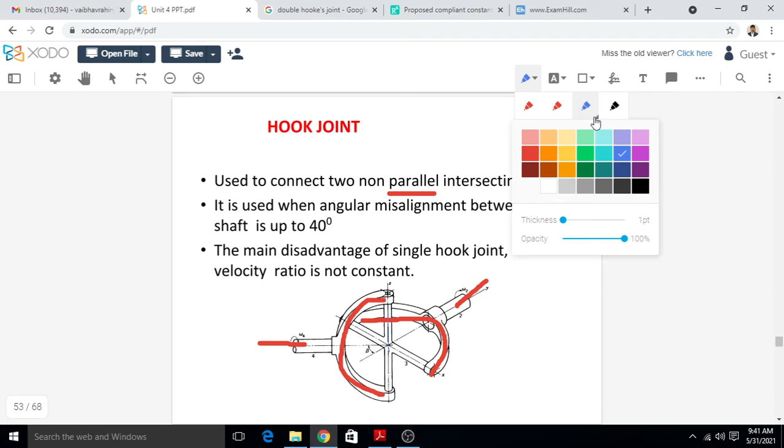And this is a cross. I will show you here. This is the cross. Two ends of the cross are attached to the driving yoke and two ends are attached to the driven yoke. The shape of the connecting link is a cross.

The inclination of the driving to driven shaft may be constant, but in actual practice while transmitting the motion it varies. We consider the angle between driving and driven shaft constant, but in actual practice it may be different or varying.

One main disadvantage of the single Hooke's joint is that the velocity ratio is not constant. If the driving shaft rotates at 1000 rpm, the driven shaft rpm is not constant. It varies between some values, and these values depend upon the angle between the two shafts.

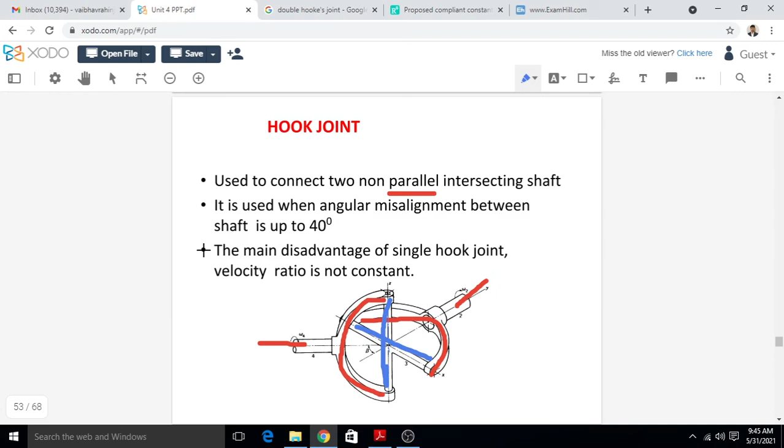This is the image of the hook joint. This is the analysis of the hook joint. These are the equations. If we see the velocity ratio equation, that is omega 1 upon omega is equal to cos of alpha upon 1 minus cos square of theta into sin square of alpha. We will derive this equation in the next lecture and we will find out the different conditions.

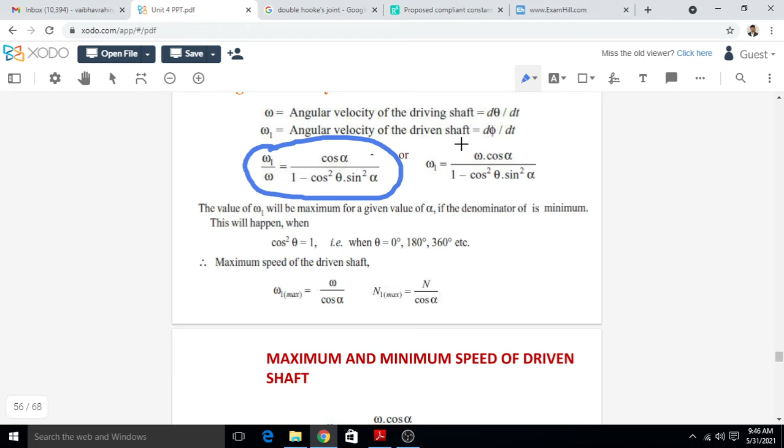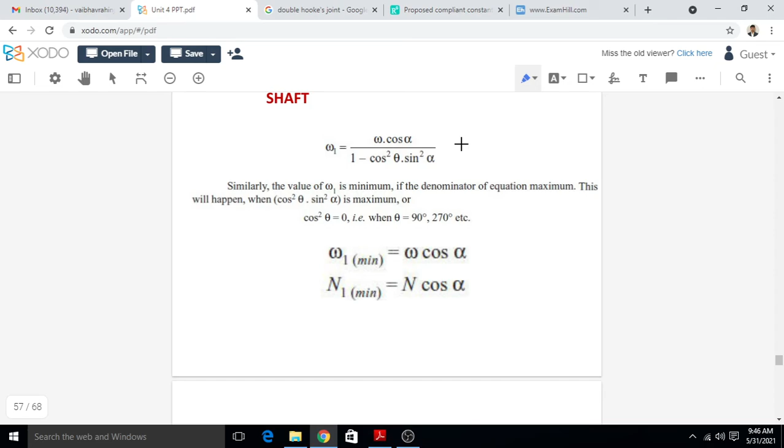Okay, these are the conditions for minimum speed. The minimum speed of the driven shaft is omega into cos of alpha. Okay, this is the equal speed. This is the condition for equal speed, when the driving and driven shaft will rotate at the same speed. Okay.

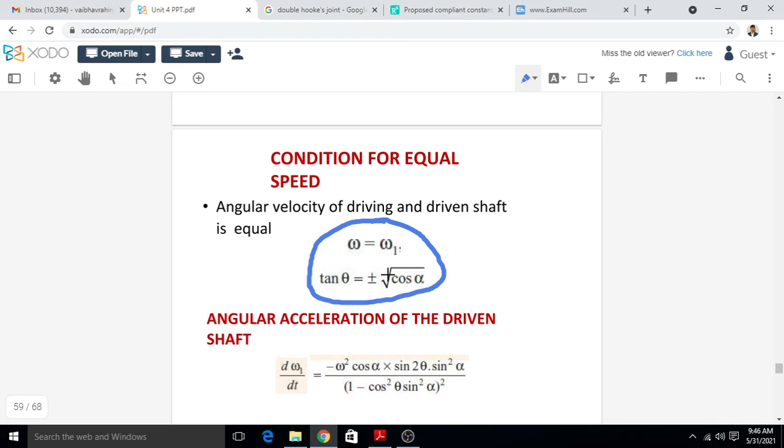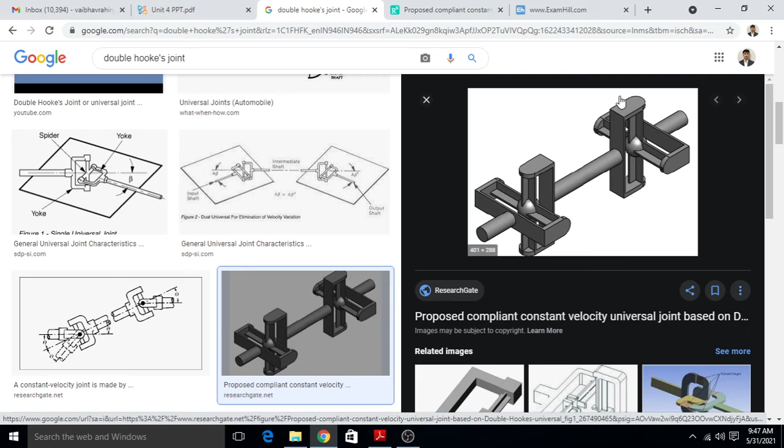Now we need to discuss the double hook joint. So we will discuss what is a double hook joint, what are its applications and advantages. Okay, first of all I will show you the double hook joint image. If we see this image, here is one cross and here is another cross and here is the intermediate shaft. Okay, intermediate shaft. See, driving shaft, it is the first hook joint.

If we see here, here is the first hook joint and here is the second hook joint, and this is the intermediate shaft. Okay, so this is a double hook joint. We will see what are the characteristics of the double hook joint. As we discussed in the single hook joint, the velocity ratio in a single hook joint is not constant and it varies from maximum to minimum speed.

The speed of the driven shaft is not constant and it will vary from maximum speed to minimum speed during the rotation of the driving shaft. Okay, if we want a constant velocity ratio of the driving and driven shaft, an intermediate shaft with a hook joint at each end is used. The purpose of the double hook joint is to obtain the constant velocity ratio.

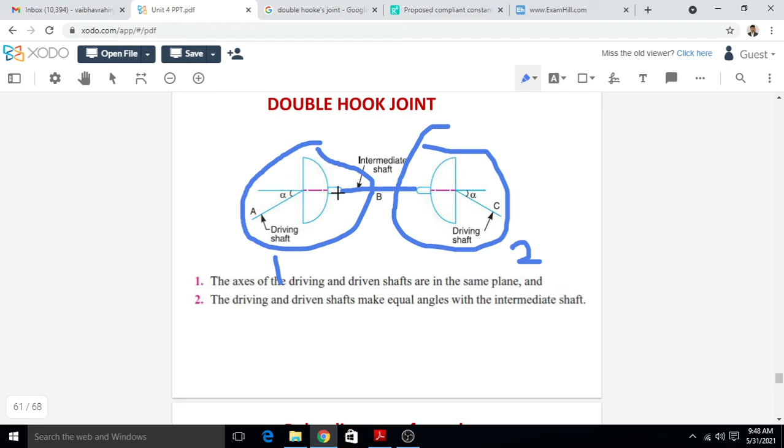The structure of this double hook joint is that this is the first hook joint and this is the second hook joint. The driving shaft is connected to the driving yoke. Then there is another yoke which is connected to the intermediate shaft. The power from the intermediate shaft is given to the second yoke, and then from the second yoke through the cross it is given to the driven shaft.

Okay, the double hook joint eliminates the fluctuation of the torque. The double hook joint is used to reduce or eliminate the fluctuation in the torque. As the speed is not constant, there is a fluctuation in the torque transmission also. But if we use a double universal joint or a double hook joint, then the torsional vibrations of the driven shaft are eliminated. The vibration generated due to torsion is eliminated by use of the double hook joint. Okay.

When we use a double hook joint, the speed of the driven shaft will be constant only when the following conditions are satisfied. This means that under just any condition, the velocity or speed ratio will not remain constant. This speed ratio remains constant only in some particular cases. We will discuss those particular cases.

Okay. The first case is that the axes of the driving and driven shafts are in the same plane. What is the first condition? That the axes of the driving and driven shafts should be in one plane. If the planes of the driving and driven shafts are different, then we cannot obtain a constant velocity ratio.